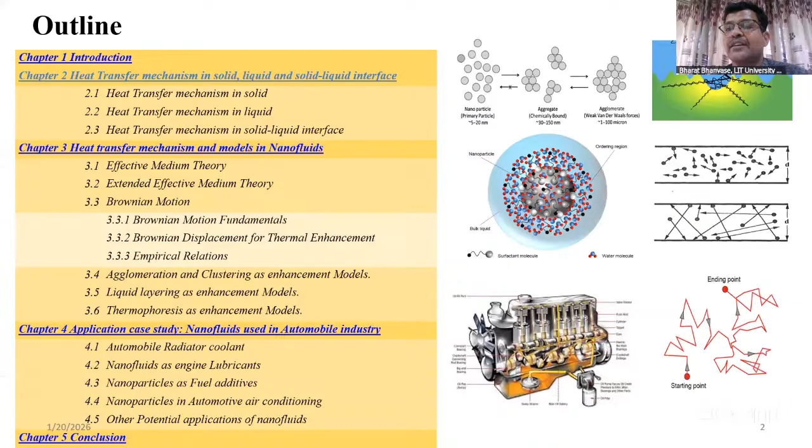Then we'll see applications as case studies: radiator coolant, engine lubricant, fuel additives, automobile air conditioning, and other potential applications also we'll see. That is the part I will cover in the first talk.

So if you see the introduction, nanofluid - that term was first coined by Choi in 1995, in his paper presented at ASME. What he did was suspend micron size particles. That was the old phenomena, which no doubt had a lot of problems if you have micron size or larger particles.

If you have larger particles, that will create erosion, pumping cost and viscosity will increase, and several problems you will get there. So Choi introduced particles in the fluid and observed some improvement in thermal properties, which are very important in heat transfer applications. By addition of this particle, he observed some improvement in heat transfer properties. But if you use large particle size, it is very difficult to explain theoretically, and it's not reproducible.

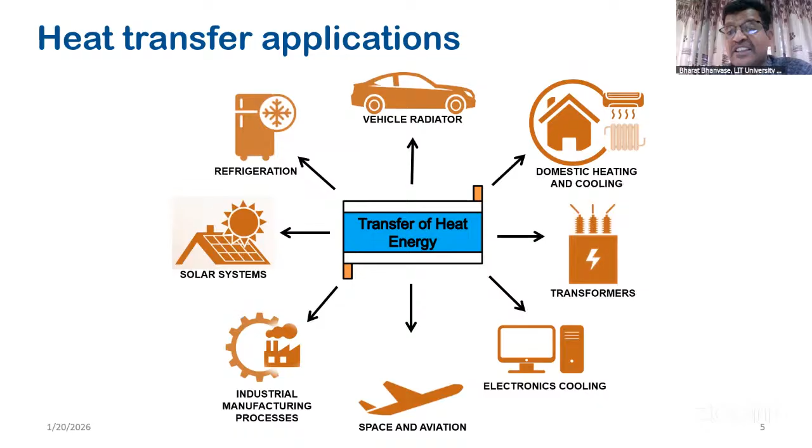Industrial manufacturing processes are there. Space and aviation is there. Electronic cooling is again very important, that is another system you can find. If you take your laptop, fan is running - so fan is for what purpose? It is just taking out the heat which is generated in the processor. Transformers, domestic heating, cooling - these are different applications for heat transfer.

So how can we improve the heat transfer rate? If you see the motorcycle engine, two-wheeler engine, outside portion of that engine has extended surfaces, called fins, and because of that heat transfer will be higher on outside surface. So if you increase the area, there would be increasing heat transfer.

Another way is you can create a micro channel, a small channel. That means the diameter will be very small, and volume will be less, but surface area will be more. So heat transfer rate can be improved. That is one way where heat transfer can be increased.

So what are the heat transfer fluids used in these processes? One is water - you will find in many applications water is used in industry as well as household application. Ethylene glycol is there, hydrocarbon oils are there, refrigerants are there, because your air conditioning is running on this.

Phase change fluids are there. Phase change means during heating it will accept the energy and it will melt, and during release of energy it will give back the energy and it will solidify. That is a phase change - only latent heat of melting. So that will absorb, that's it.

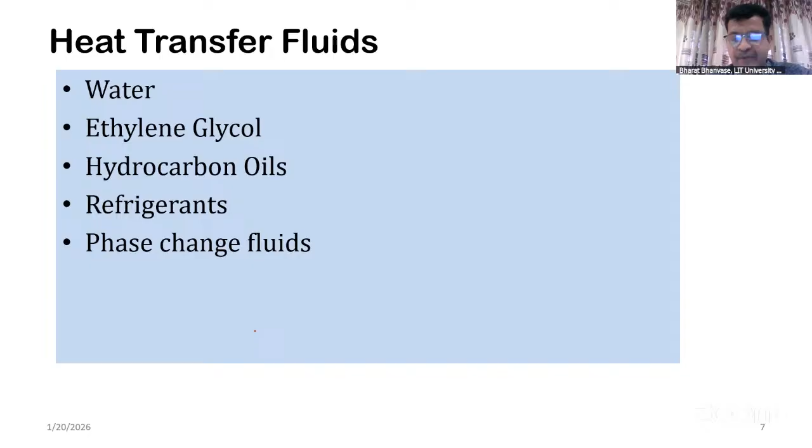So if you see the fundamentals, already we know conduction, convection, and radiation. For conduction, suppose you see a tightly packed solid material. In the case of solid, all the molecules are tightly packed, so heat transfer will be in sequence, from one molecule to another, through the vibration of molecules, propagating phonons, and diffuse free electrons.

These are different applications here. Then another type is loose molecules - that is your liquid and gas. In liquid, distance will be there, so collision between molecules is very important for transfer of heat from one part to another. For gaseous systems, distance will be more, so heat transfer will be less, because the distance between two molecules is very high compared to liquid. So the thermal conductivity of gases is very less.

So gases have thermal conductivity less than 0.1, or less than 1 watt per meter Kelvin. For liquid, for water, it is from 0.2 to almost up to 10. Then for more non-metallic solids, like ice or other material, that is ranging from 0.8 to 100.

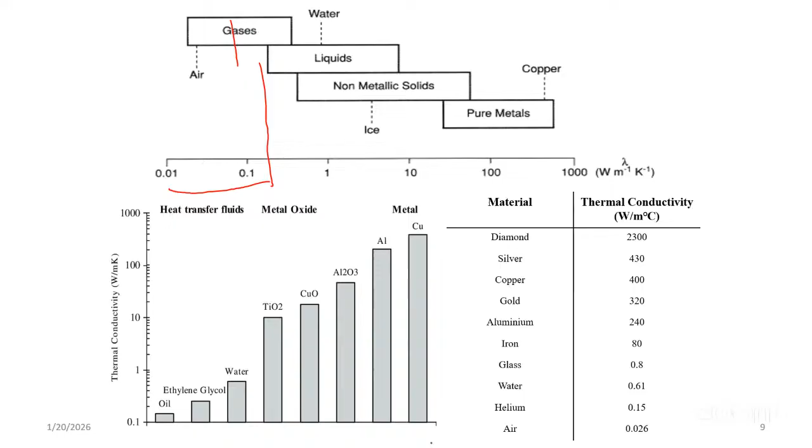Okay, we'll continue. For pure metals, thermal conductivity is very high. For air, thermal conductivity is 0.02. Then for helium, it will increase to water, that is 0.61. And it will increase to diamond - diamond is almost 2300 watt per meter Celsius. That's how, for metal oxide or other things, you will find improvement in thermal conductivity as you go from gas to solid phase.

So if you have micro size and macro size particles - macro size, that means if you have larger particle size, you will have one advantage, higher thermal conductivity, no doubt, but disadvantage is agglomeration, clogging, erosion in pipeline, and higher pressure drop. These are the problems you will observe with this.

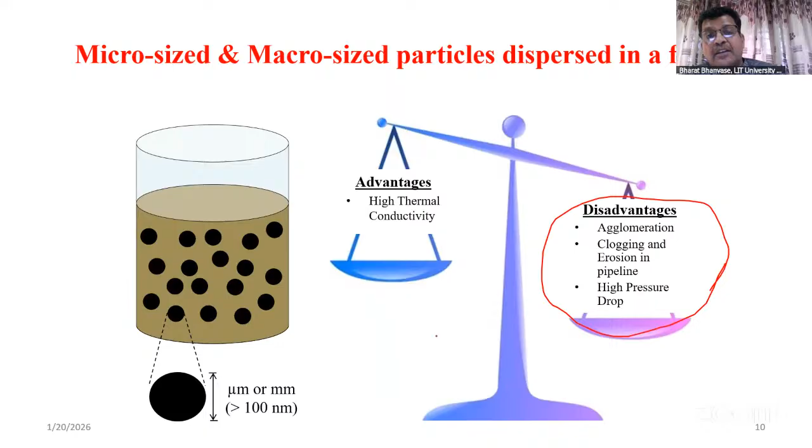Then nanofluid is another one, as we are discussing, that is very important. Here nanometer size particles are dispersed in the liquid, and these particles are suspended. In suspension, many times settling is observed, but for that you can have some surfactant and you can stabilize that.

So these suspended particles in a liquid, that is called nanofluid. Nanometer size particles, that is very important. Choi and Eastman termed this in 1995, which will have higher thermal conductivity, large surface area, high stability. That was the intention, that was the objective for this particular nanofluid.

So what are the advantages of nanofluid? High heat conduction, that is one. Then stability will be more. Then microchannel heat transfer without clogging, that means if we have a small diameter pipe through which nanoparticles should pass, then reduced erosion, so the pipeline will be intact, it will not get damaged. Reduction in pumping power, that is another application.

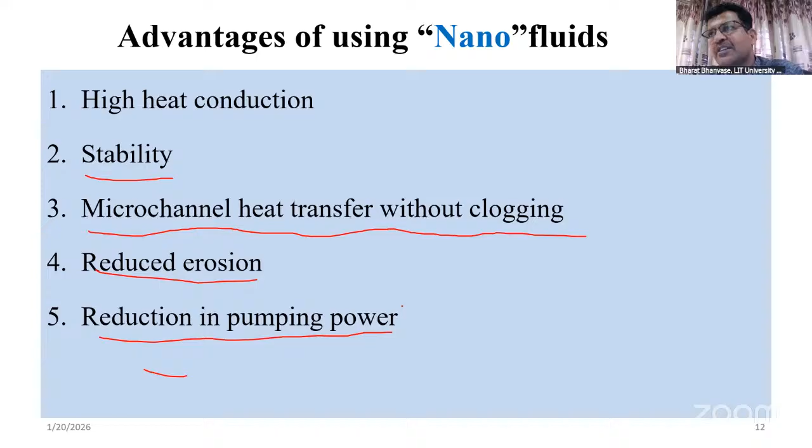Fluid, that means water or anything you can take here. Another one is movement of this particle, that will be motion, that means every particle when suspended in water is in motion. So that is another way by which transfer of heat will take place. So these are the different mechanisms.

If you see Brownian motion, every free particle present in gas or liquid will take a path and move in different directions like this, right, it is free to move. During this, that is called Brownian motion. So that is one phenomenon, that's how energy is transferred from one location to another location.

Another one is nanoparticle clustering, that is another phenomenon. So your nanoparticles form a chain like this, and that's why heat transfer will take place in this particular direction. There is heat conduction, you can say.

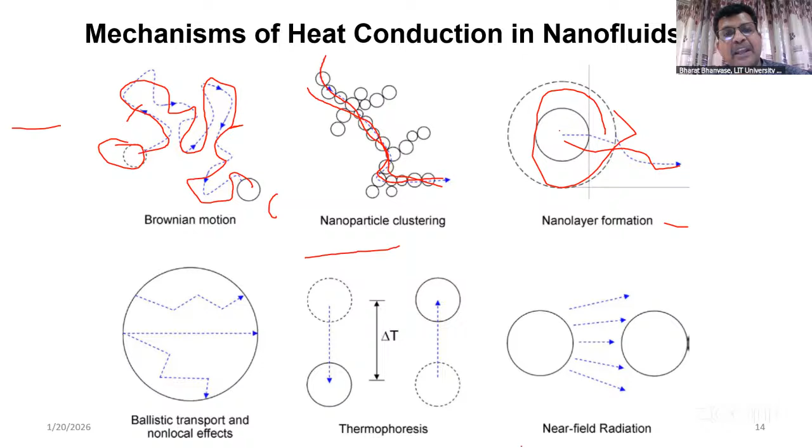Another one is nano layer, that means some solid-like layer is formed around the nanoparticle, and that's how heated nanoparticle, that means heat, will be transferred from this nanoparticle to the fluid. Then ballistic transport, that is because of non-local effect, thermophoresis, that is because of temperature difference, then near field radiation. These are the different phenomena, mechanisms by which heat conduction takes place in the liquid.

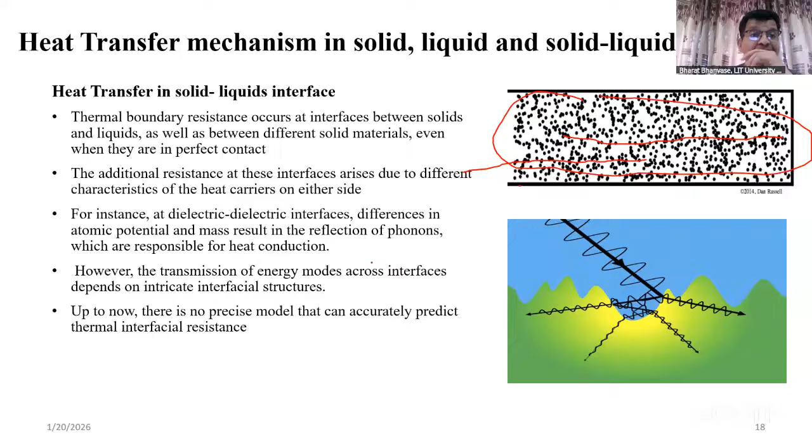Then this is solid-liquid interface. Suppose this is the case: here we have stationary nanoparticles suspended in water, and if you give some shock on one side, there is a movement of particles and they will start colliding like this, and that's how heat is transferred from one point to another particle, another point. So that is the solid-liquid interface part.

So if you see the mechanism, we have already discussed this. Brownian motion will be there, that means the nanoparticle will move in the liquid from one point to another point in suspended manner.

So that is the Brownian motion, you can say. Clustering of nanoparticle, already we have seen. So two nanoparticles will form a layer, and they will form a chain, and then heat transfer will take place from one particle to another particle.

Then nano layering of liquid and liquid nanoparticle interface, that is another one. So if you see this nano layer, we have this particle, and around that one layer is created, and that is a conductive cover which is generated, and that's how heat is transferred from one particle to the liquid and then another particle. Then ballistic transfer, that is because of some shock wave.

Then thermophoresis, that is because of temperature difference. So if you see this effective medium theory, that pertains to analytical and theoretical modeling that describes the macroscopic properties of the composite material. If you have different composite materials arranged in series or parallel, its thermal conductivity can be calculated using these equations, and that is well presented by Maxwell's in 1873.

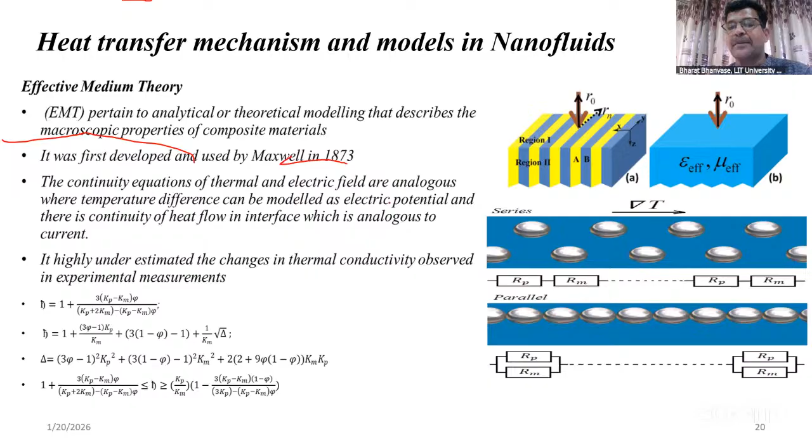So initially we have separate nanoparticles, but then aggregates are formed. This is one aggregate, another aggregate, like this, so it will form a chain-like structure. That is because of weak van der Waals forces which are present there, and no doubt if you stir or apply some force, that will get separated.

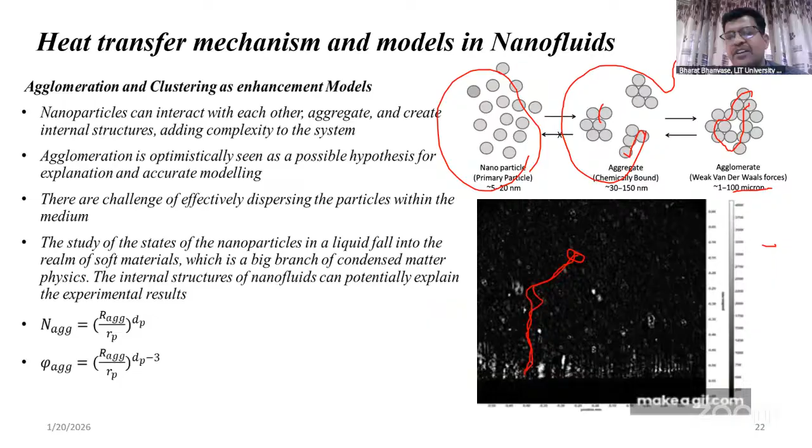So that is another mechanism by which heat transfer can be improved with the use of nanoparticles. So this is thermophoresis. With increasing temperature, no doubt every particle will accept that energy, and its energy will increase and its movement will be fast. So bombarding of these nanoparticles on each other with increasing temperature will be higher than with decreasing temperature.

So another case, if you go ahead, that is all fundamentals already we have seen: Brownian motion, then nano layering, thermophoresis, nanoparticle clustering. So that part already we have seen, and now we have classification of nanofluid.

How can we classify this? There are two types. Nanofluid is nothing but addition of nanoparticles in water or ethylene glycol, that is liquid, so solid particles are added in liquid. If you use only one type of nanoparticle suspended in water, that is called mononanofluid, meaning one type of nanoparticle, just like copper oxide dispersed in water. Only copper oxide, that is mono.

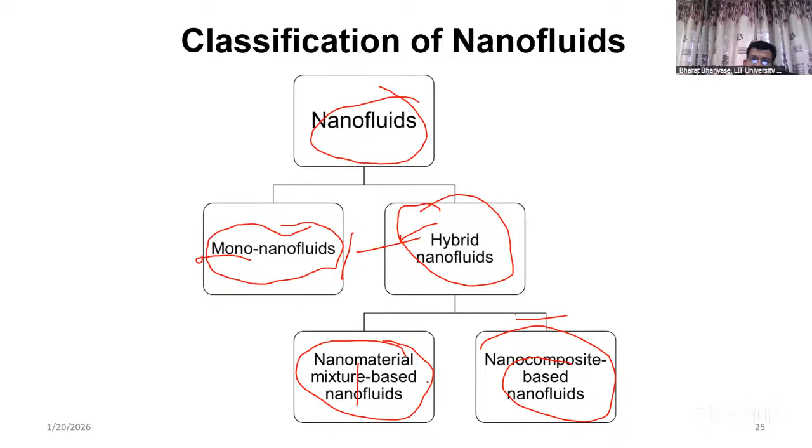And then it is added in base fluid, so that is forming nanofluid. That is called nanocomposite based nanofluid. And the first one is nanomaterial mixture based nanofluid. So that is the classification you can see.

So what are the applications you can find here? Applications are a wide range. Starting with heat transfer, heating, cooling, thermal management system, refrigeration system. Nowadays nano refrigeration concept is there, right? Many people are working on this concept.

Then solar thermal system. We have one project now from Maharashtra Energy Development Agency of 1 crore, and we have installed 100 kilowatt solar panel system where we are applying nanofluid for heat transfer purpose here.

Then extraction of energy from sources. That means in such cases, material selection is very important. Remember, how we are selecting nanoparticles is very important. So nanoparticles should be dispersed properly in the system. Here the dispersion is okay.

One more point is when you are saying extraction, that means how energy is taken from one source, suppose a solar system. It should be able to take that energy very fast, and then it is transferred. And if you want to store that, then heat capacity of that nanoparticle should be very high. Only then will it store the energy. So that is another application.

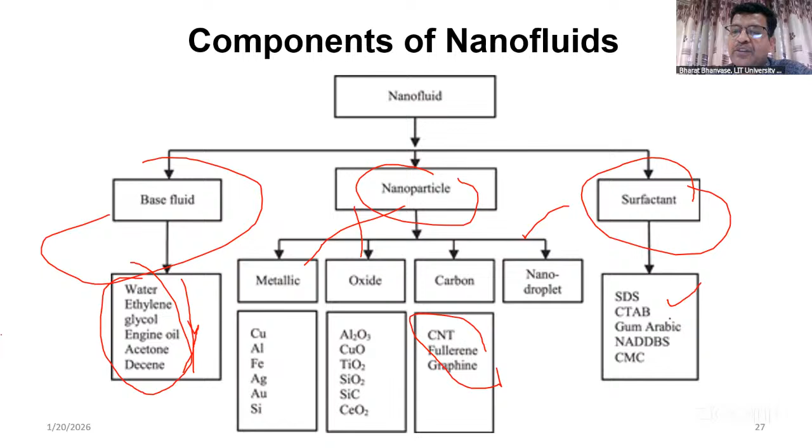Then another part is surfactant, because many times these particles get settled. In that case we need to add some stabilizing agent, that is sodium dodecyl sulfate or CTAB or gum arabic, or CMC. Other surfactants can also be added based on the material we have selected.

So preparation of nanofluid - this is one case study I'm putting here. Suppose one step method. What happens in one step method? Suppose I want to disperse copper oxide. For preparation of copper oxide, what type of precursor, that means reagents, are required for the preparation of copper oxide.

So what I will do, these precursors will be added - that is first reactant, this is second reactant. These two reactants are added to the system, and then reaction takes place. During reaction, copper oxide is formed, and this copper oxide is in nanomaterial size. So that is suspended in the system, and the same system will be used as a nanofluid.

That is called one step, meaning only one step. That means reaction is taking place, and whatever nanoparticles are formed, the same is used as a nanofluid.

But what are the drawbacks here? The drawback is nothing but whatever impurities are formed because of the reaction, that means byproducts or some unconverted material. That will remain as it is in the system, and no doubt that will affect the properties of the nanofluid. So how should it be then?

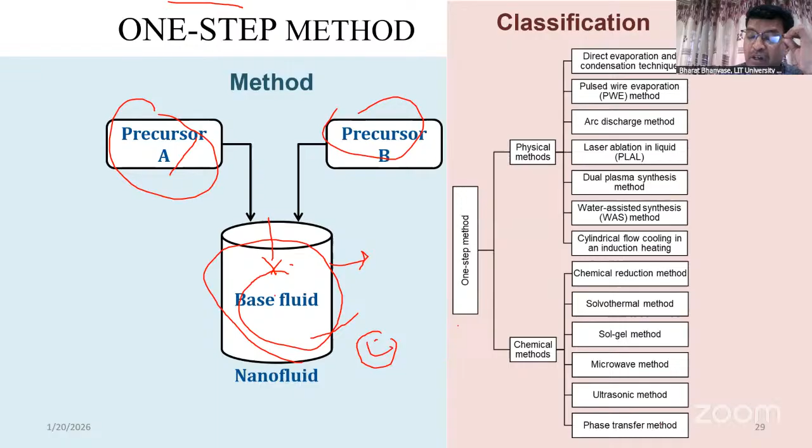So for nanofluids, what are the different studies related to this? What type of study can we carry out? One is preparation of nanofluid by one-step as well as two-step method. Once it is prepared, we have to check the properties of nanofluid. What are the properties that you can check?

One is thermal conductivity of nanofluid, which we can check using the transient hot wire concept, and for that the KD2 Pro instrument is available. With this you can calculate the thermal conductivity. Then another property is viscosity, for which you can use a viscometer or rheometer, or check rheological properties as well.

Another property is density of that nanofluid, which you can measure using a density bottle or other density measurement instrument. Then specific heat, CP value, and then surface tension can also be calculated. So these five properties are very important for nanofluid, because based on that only we can design the application system.

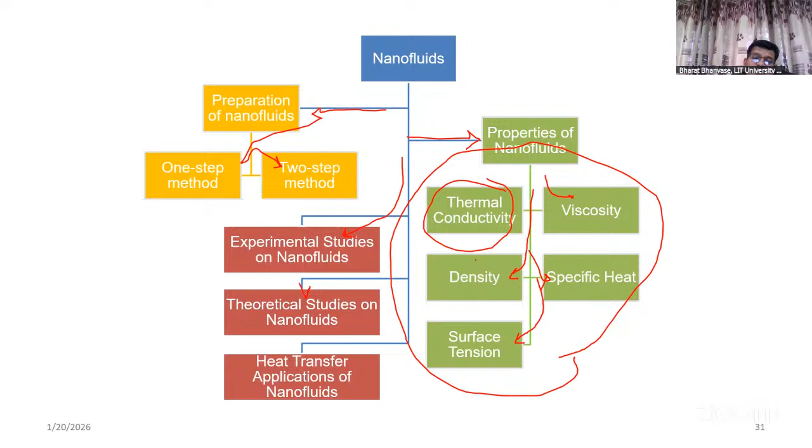Then for theoretical studies, based on experimental data, empirical correlations can be developed, such as relations for thermal conductivity, density, viscosity, or specific heat. Some theoretical studies can be calculated using heat energy balance equations or material balance equations. And heat transfer applications can be seen in solar systems or transformers, and many other applications as discussed earlier.

So that is part of nanofluid. Why is there a need for research? Many people are working on nanofluid, so why is there a need? Because we need to identify what enhancement in heat transfer is achieved with the use of nanofluid. That is very important - by adding nanoparticles, how much enhancement is possible.

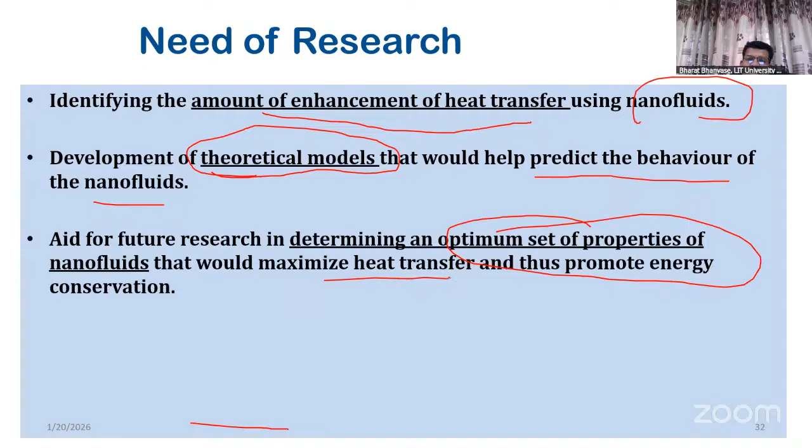Then we have to see some theoretical models that will predict the behavior of nanofluid properties, such as thermal conductivity, viscosity, or density. And no doubt we have to see the optimum set of properties to maximize the heat transfer, and thus promote energy conservation.

Another aspect is that if we have nanoparticles of different size, shape, different types - that is 1D, 2D, 3D, 0D nanoparticles - as well as its concentration and composition, that will affect the base fluid's dispersion or properties. Different properties will alter and change with the addition of nanoparticles, such as thermal conductivity, viscosity, density, and heat capacity.

So that is very important, that we need to see how it is getting changed with respect to addition of nanoparticles. Then effectiveness of heat transfer processes employing nanofluid also depends on various flow geometries and conditions. Then some applications proposed for the nanofluid require mathematical support and simulation in order to interpret their actual behavior.

So what are the gaps in study? More research is on fundamental than industrial application. That means many fundamental studies are done, but industrial applications are many missing there. Then various geometries, lab scale heat exchangers, solar and refrigeration setups - that study is needed.

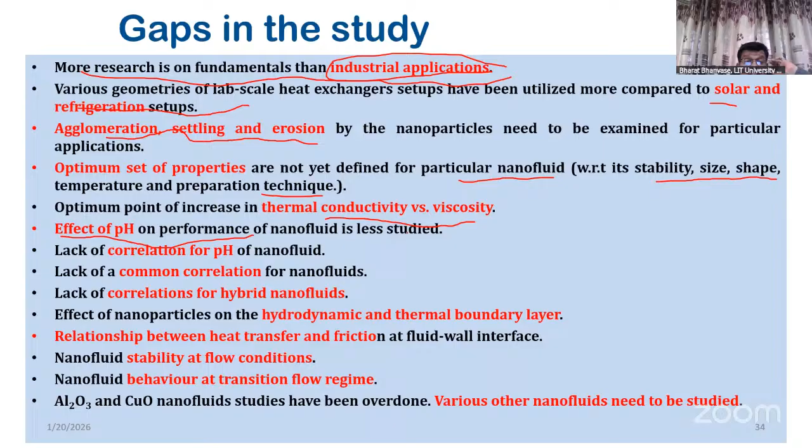Then effect of pH on the performance of nanofluid, that we need to see. Lack of correlations for pH, because pH will affect - acidic or basic medium will affect the stability of nanofluid. Then different common correlations for nanofluids, lack of correlations for hybrid nanofluids, so that fundamental research can be carried out. Then effect of nanoparticles on hydrodynamic and boundary layer theory, the boundary layer thickness - how it will change and how it will affect the heat transfer properties. Then relation between heat transfer and friction at the fluid walls interface.

Then nanofluid stability at different flow conditions, nanofluid behavior at transition flow region - laminar, turbulent - that also we have to see. Copper oxide and Al2O3, many people have studied. Other nanoparticles we need to see - so many are there. You can see different parts, some theoretical studies also you can do, CFD - computational fluid dynamics - and all this can be done again.

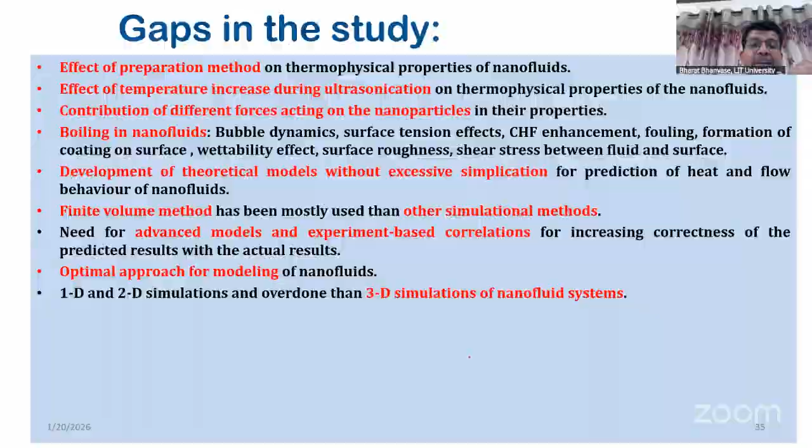So one case study I will put on this, and then another part I will see. What we did - we have prepared Ag-doped Fe3O4 nanoparticles in the lab, and those are dispersed in water as a heat transfer fluid. And then that heat transfer study was in pinch pipe. Pinch pipe is, I will show how it looks like.

So in this case, what we have done - we have to see the desired structure of nanoparticle is very important here. The synthesis process that we need to consider here. So Ag-doped Fe3O4 nanoparticle addition will create a composite, and that composite was prepared by ultrasound assisted technique and mini reactor - that is very small reactor we have used for the preparation of nanoparticle, and its synergic effect was studied in this case.

This formed Fe3O4 nanoparticles were dispersed in reaction medium, and then AgNO3 is added, and then sodium borohydride - so that will lead to the Ag-doped Fe3O4 nanoparticle. Its characterization is done by XRD, FTIR, then other techniques. And then preparation of nanofluid is done, and then stability test was carried out. Then thermal conductivity measurement was done, density measurement was done, and then convective heat transfer and pressure drop study was carried out for this case study.

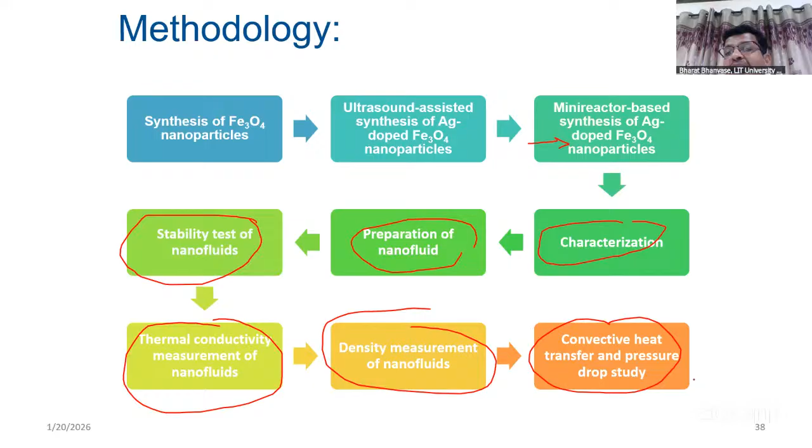So if you see the experimental part here - FeSO4, FeCl3 addition, then NaOH was used, AgNO3 was used, sodium borohydride was used. And then sodium trisodium citrate dihydrate was used as a surfactant.

So what we did - FeSO4, FeCl3 is added, that mixture was done, and then it was sonicated in a bath sonicator, and then addition of NaOH was done here. This ultrasonication - after addition also ultrasonication was continued, and after that filtration, and then that will lead to the formation of Fe3O4 nanoparticles.

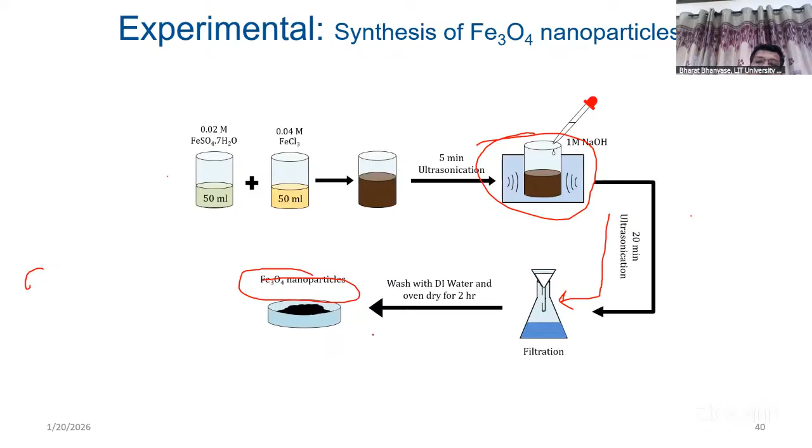So that was done in lab. Here we have taken some amount of Fe3O4, that is 0.2 gram, and it is sonicated for achieving proper dispersion. Then trisodium citrate dihydrate was added to stabilize the particle, and we added sodium borohydride, then dropwise addition of AgNO3 solution was carried out. So on the Fe3O4 nanoparticle, deposition of Ag nanoparticle takes place, and after filtration you get Ag doped Fe3O4 nanoparticles.

We tried different sodium borohydride concentrations as well as surfactant concentrations. This is the setup for the preparation of nanoparticles in syringe A, B. The first one was with ultrasound only, and this was done with a minireactor. Syringe 1, A, B, C — this material goes inside and flows inside, and during its flow the reaction takes place, and you get nanoparticles at the end. So this is your geometry.

The length of this reactor is 1.79 meter. The inside diameter is 2 mm, and the outside diameter is 5.5 mm. That was there, and this is the setup we have used.

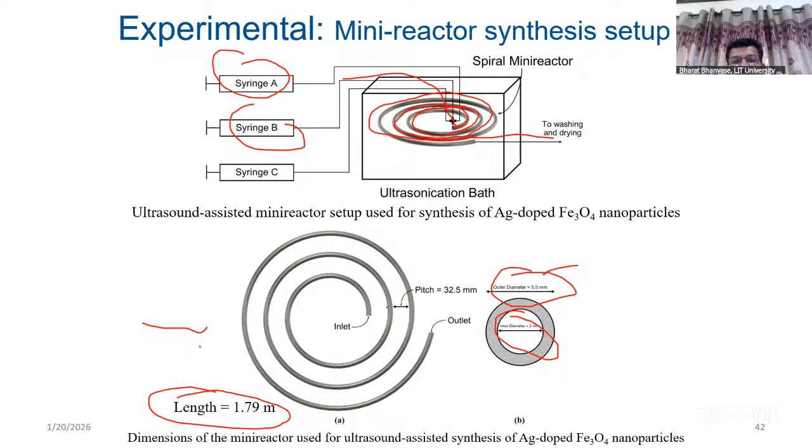In syringe A, we used 0.2 gram of Fe3O4 nanoparticles, sonicated in the presence of sodium citrate, with flow rate maintained at 200 ml per hour. In syringe B, we added AgNO3 solution, 0.01 molar, with flow rate 100 ml per hour. In syringe C, sodium borohydride solution with different concentrations, tried in lab, at 100 ml per hour.

Syringe A is your Fe3O4 nanoparticle with surfactant, B is with AgNO3, C is with sodium borohydride. As soon as it enters, the reaction starts, and during its flow crystal growth takes place — deposition of Ag occurs, and by the time it comes out, doped material formation is there. That was characterized by UV-Vis, FTIR, XRD, and TEM analysis.

Nanofluid preparation was done by the two-step method, because the Ag doped Fe3O4 nanoparticles we prepared were dispersed in water with the help of ultrasonication, so it is well dispersed in the water. Then we carried out the stability test using the sedimentation method. For that, differently concentrated nanofluids were prepared, and the test was carried out for 2 months, with photographic evaluation done here.

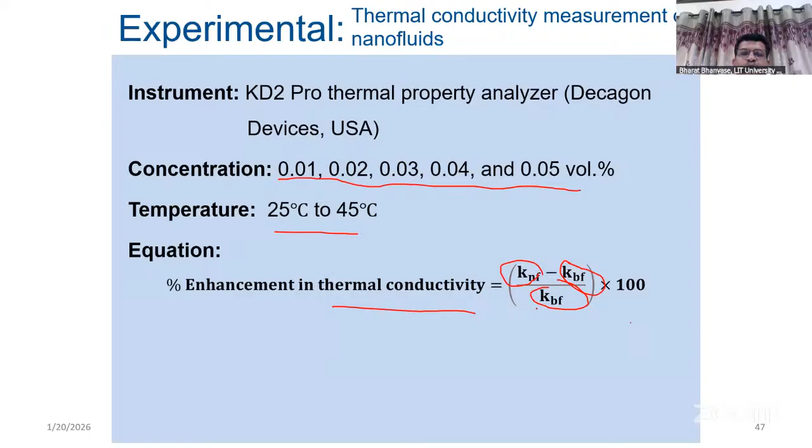For thermal conductivity, we used a thermal property analyzer for the measurement at different concentrations. Concentration of nanofluid is 0.01, 0.02, 0.03, 0.04, 0.05 volume percent, and temperature was varied from 25 to 45 degree Celsius. Percent enhancement in thermal conductivity was calculated as thermal conductivity of nanofluid minus thermal conductivity of base fluid, divided by thermal conductivity of base fluid. That is the simple relation used for the calculation.

Density measurement was done by density bottle with the same concentration of nanofluid at room temperature, and relative density was calculated. This was the experimental setup used for the heat transfer study.

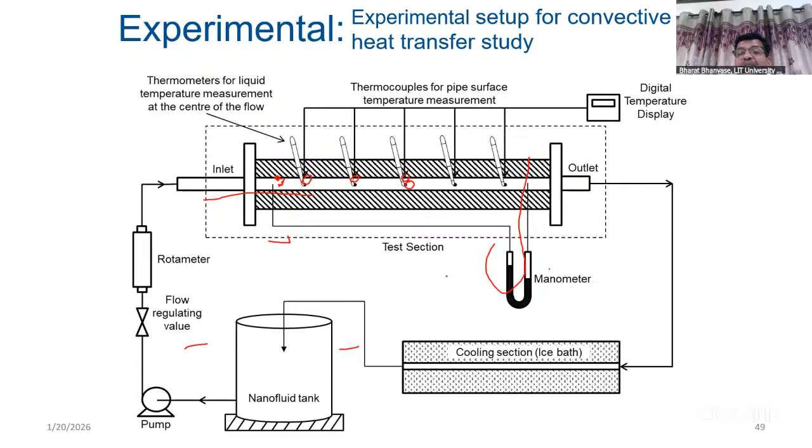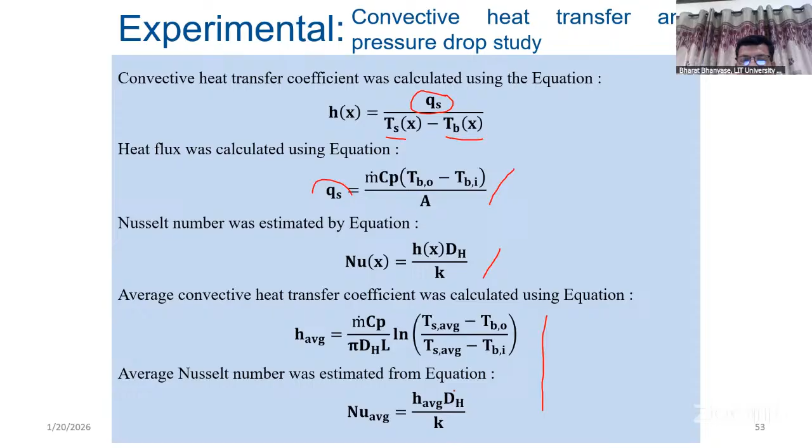Then pressure drop calculation was done by delta H rho G, and also by the Darcy-Weisbach equation. Friction factor was calculated from delta P. You can substitute delta P here, length of pipe, velocity, density, and diameter, and from that you can calculate the pressure drop.

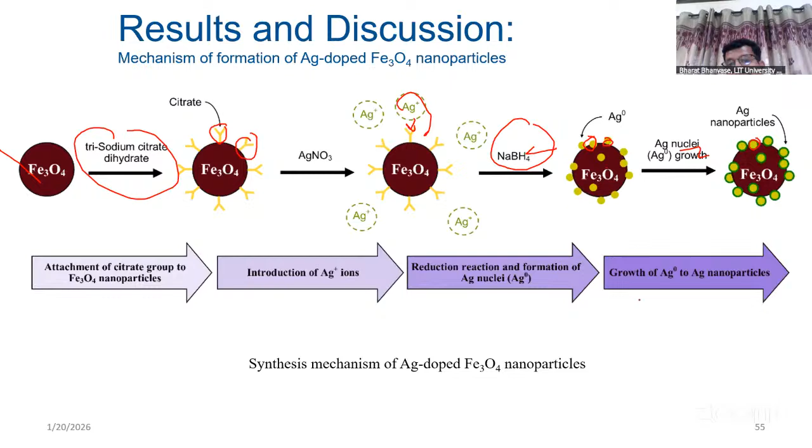So advantages of ultrasound: better contact between the reacting species, exposure of Fe3O4 nanoparticle would be very good, and distribution of Ag over the surface - that is uniform distribution of Ag over the surface of Fe3O4. So that is the formation of Ag-doped Fe3O4 nanoparticle.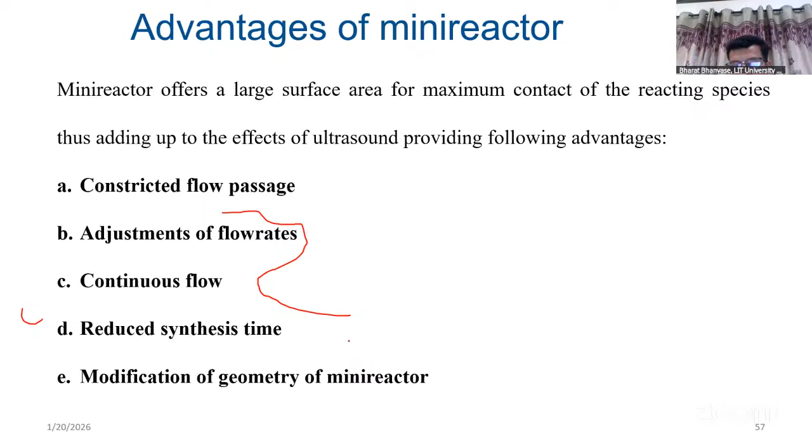And microreactor, or we are calling this a mini reactor, it's the same thing again. Here we have small reactor diameter, so adjustment in flow, continuous flow will be there, so continuous synthesis of dope material is possible. Reduced time, so in lesser time, formation of Ag dope Fe3O4 nanoparticle is there. These are some advantages.

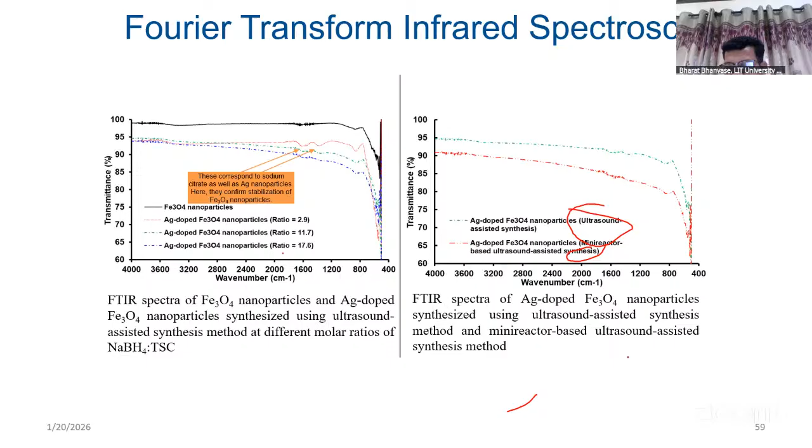But if you see the Ag-dope Fe3O4, this is another one, you can see Ag doping is there on these particles. Then we have carried out the stability test - this is initial condition at different volume percent. After 1 hour, you will observe settling, this is for the case of only Fe3O4 dispersed in water, that is water-based Fe3O4 nanofluid.

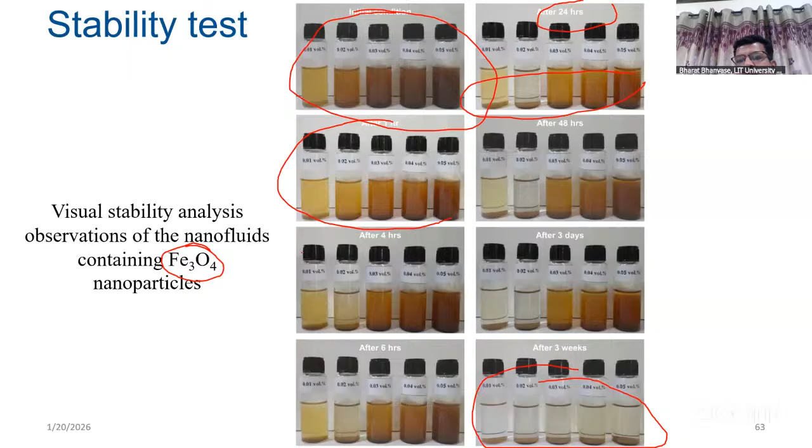Then settling continues after 24 hours, you can observe this, and then after 3 weeks, complete settling was observed. So that's why you can say Fe3O4 nanoparticles, even if in smaller size, its stability after maybe 24 hours or so gets decreased.

If you see this ultrasound, that is Ag-dope nanocomposite or nanomaterial prepared in mini reactor, ultrasound assisted mini reactor, it is observing higher stability here. After 6 weeks also, you will observe the nanofluid is stable here.

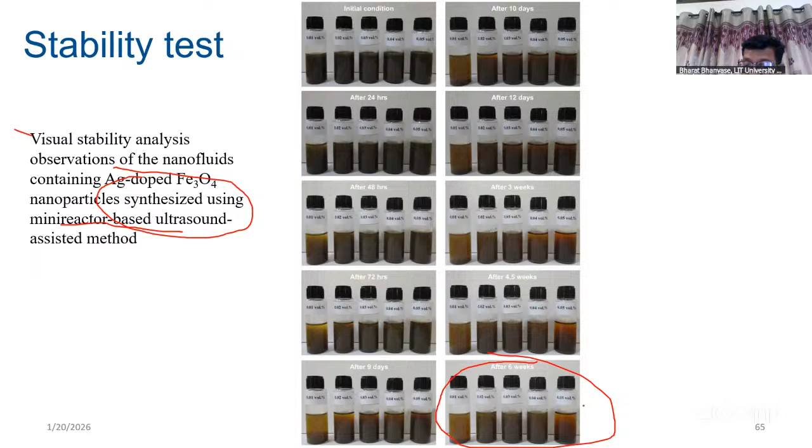So stability study was carried out here, and you can observe this at different volume percent: 0.01, 0.02, 0.03, 0.04, 0.05, 0.1, like that.

So here one phenomenon is observed, its primary stable period. This is primary stable. After that settling is observed. Then stability regaining period - regaining means some cluster formation takes place, and that will again improve the stability. That means some forces get balanced, interactive forces between the nanoparticles get balanced, and you will observe complete stability after this. That is secondary stable period.

But Fe3O4 is unstable, right? So settling period is there, no doubt. But with the addition of Ag-dope material, stability gets improved here.

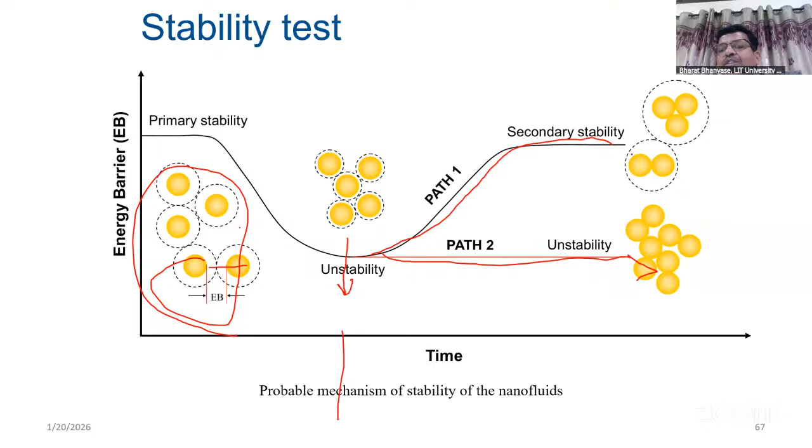So from that we have just predicted some mechanism. So this is initially stability, right? No doubt energy barrier is calculated between the two particles. And after that, once that energy gets balanced, in that case your unstable period will be there - another unstable period, and then it will continue. In the case of Fe3O4, we observe this. But in another case, secondary, some redispersion of these clusters was observed, and that is nothing but your secondary stability period.

Then we have measured thermal conductivity as a function of concentration of nanoparticles at different concentrations, and at different temperatures also. We observe that with addition of nanoparticles, thermal conductivity gets improved, with the addition of nanoparticle as well as with increasing temperature, both. So you can observe this.

In the case of Ag-dope, some interesting phenomena was observed. When we are measuring the thermal conductivity at lower temperature, we observe higher thermal conductivity, and then with increasing temperature it is decreasing first and then increasing. That was the observation we got in the case of Ag-dope Fe3O4 nanoparticle prepared by ultrasound assisted method or in microreactor.

Same observation here. So you can see the thermal conductivity which was calculated, and you can observe that at 45 degrees Celsius, highest thermal conductivity will be there. And with no doubt, with increasing volume percent of nanoparticle, thermal conductivity gets improved here.

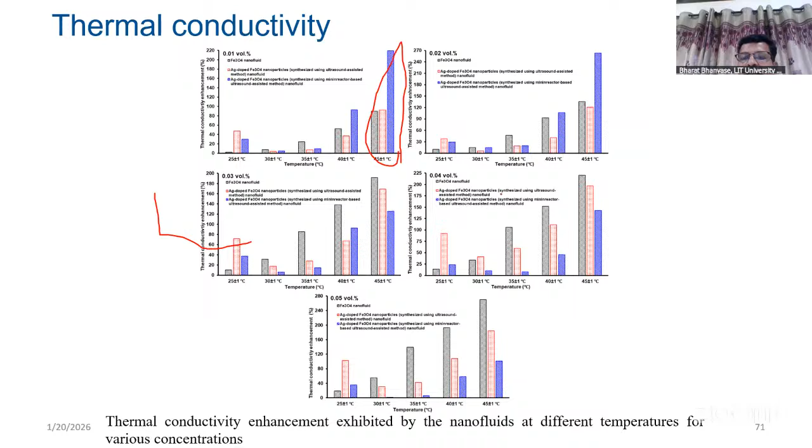Then convective heat transfer study, we have calculated Nusselt number. Already we have discussed some correlations in previous slides, and from that we have calculated. So at different positions in the reactor, in the heat transfer tube, we can calculate the heat transfer. It is observed that with increase in Reynolds number, the Nusselt number gets improved here.

This is for 0.01% volume percent, this is for 0.02% volume percent - that nanoparticles we have added in the base fluid. So that's how it is improved here, at different Reynolds numbers we have calculated.

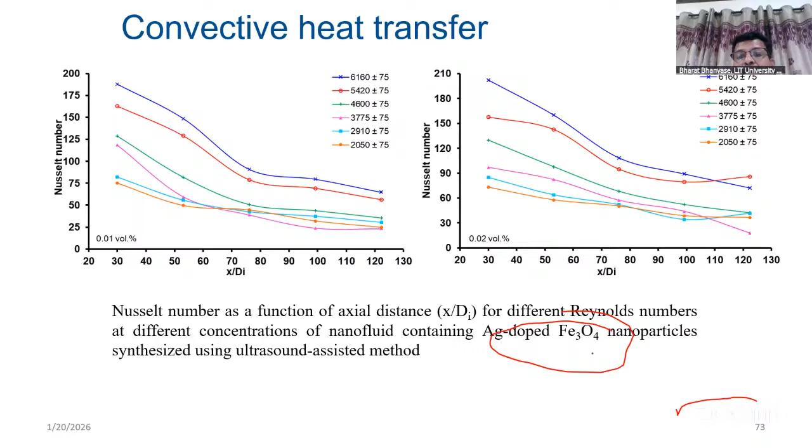That's why that shows that in microreactor with the use of ultrasound, some crystalline material is formed, and that is more effective in transferring the heat, which will have higher thermal conductivity. That material is properly formed, and that will help in enhancement in the heat transfer.

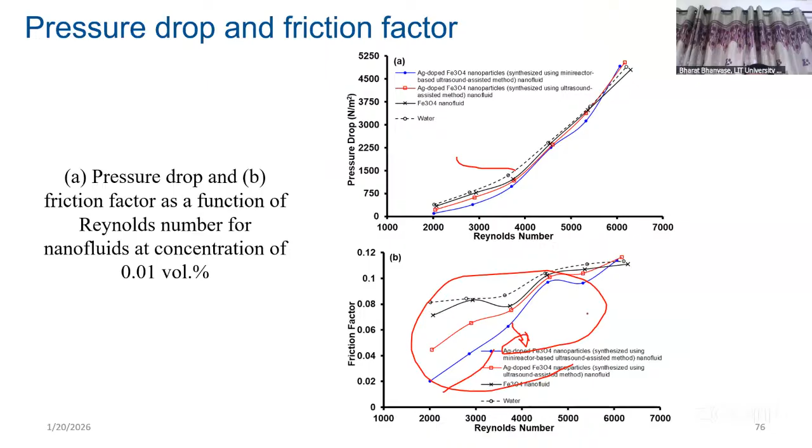So that is called shear thinning phenomena. If you see the rheological properties, with the addition of nanoparticles, in some cases if you apply pressure, viscosity decreases. There are some cases where by applying pressure, viscosity increases - where viscosity increases, that is shear thickening; where viscosity decreases, that is shear thinning. In this case, shear thinning phenomena is observed here.

Coming to different applications, nanofluids can be used as a coolant in car radiators, in internal combustion engines. This is the radiator, this is the airflow, and the nanofluid will flow and come to the engine. It will take heat from the engine and reject it here. So nanofluid will improve the heat transfer rate, and engine efficiency can be increased.

We can also add these nanoparticles in engine oil, which will improve the lubrication effect in the system.

Another application is that with the addition of these nanoparticles, they can act as a catalyst in the piston chamber where fuel burning occurs. As a catalyst, it will convert your fuel completely into carbon dioxide or water, so there is no formation of carbon monoxide, which causes black smoke.

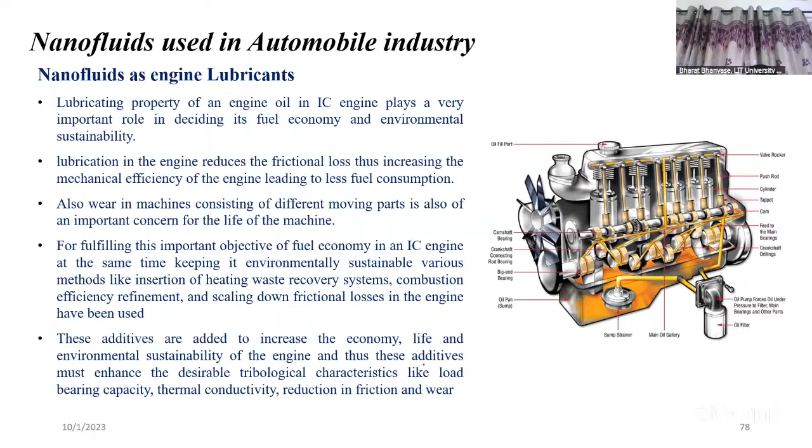You can also add this nanoparticle as a fuel additive. As discussed, it will have some catalytic activity that helps in converting your fuel completely, ensuring complete combustion by adding these nanoparticles.

Then in air conditioning, nowadays we are calling this nano-refrigeration. In this case, in a compressor, whatever oil is present, we add some nanoparticles, and that improves the efficiency of the refrigeration system. No doubt people have tried this at lab level, but at industrial level or actual case, it is still pending. Many people are working on this.

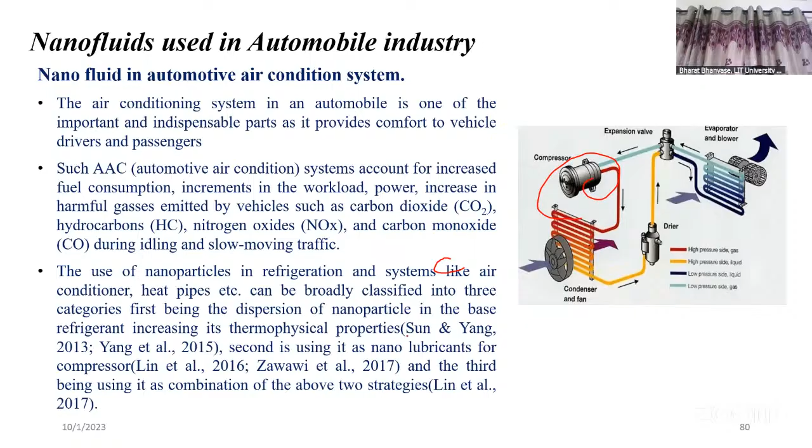Other potential applications of nanoparticles include polymeric nanocomposites. You can use them as additives in fuel cell batteries for preparation of electrode material or membrane material in fuel cells or batteries. Nanoscale sensor materials can also be prepared using these nanoparticles, and different catalyst preparations are possible.

Nanoparticles can be added during the preparation of tires, giving more strength to the tire. The nanocomposite coating industry is also very important - everywhere paint and coating is used, and adding different nanomaterials or nanocomposites improves coating efficiency, anti-corrosion properties, and mechanical strength. Impact strength increases, so after impact the coating will not get disturbed.

Heat shielding is there, nanofilm, self-cleaning is also there. That means if you have a super hydrophobic surface - suppose a kitchen sink coated with super hydrophobic material - whatever dirt, food material, or waste is there, it will not stick to the basin. So that is a good application, meaning the cleaning effect will be very efficient.

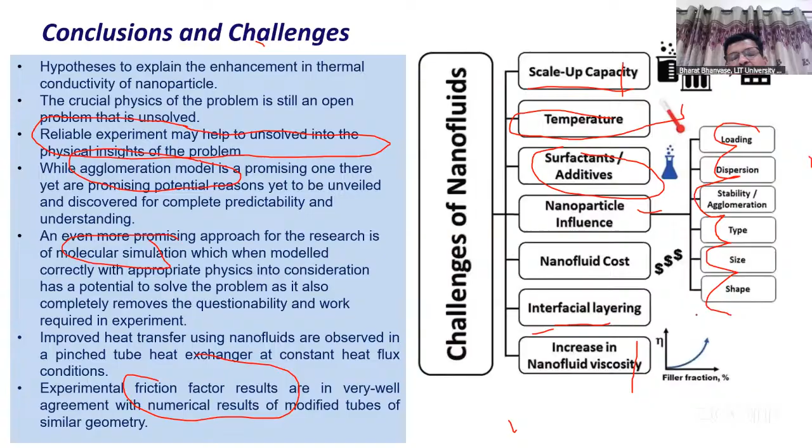Hello. Hello. Hello sir, yes. Dear participants, if you have any questions, the session is open for discussion. You can ask questions without any hesitation. I am Dr. Mote, sir.

You explained a very nice lecture in case of nanoparticles, and if we think of it as a coolant in a four-wheeler, how does it work, what benefit happens? We are adding some coolant in that system, right? Nowadays in different car radiators it is there, and they are using, I think, ethylene glycol.

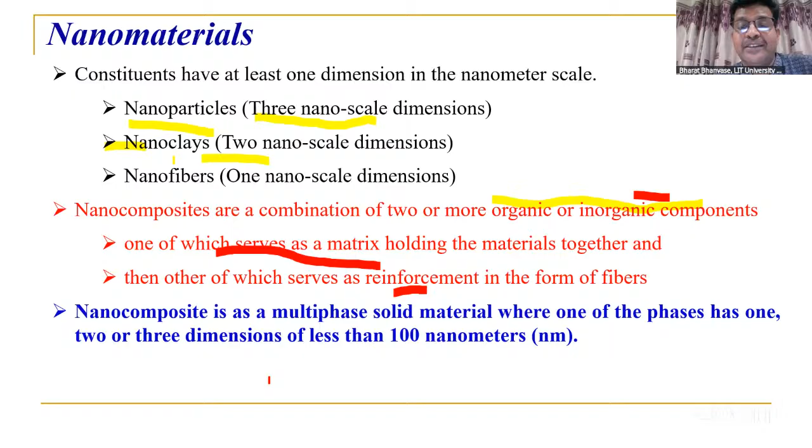For clay case etc. Then nanocomposite is a material, right, one phase or any other material which is in 100 nanometer diameter, or that is the dimension we have. So properties of nanocomposite generally depend on constituent phases, that means what material you are using, right, then relative amount, what amount you are using. Then geometry of that material which we are adding, that is dispersed phase, shape of the material, then particle size, particle distribution and particle orientation. Everything is very important to have a good property at the end.

So what does nanocomposite offer here - lightweight, design flexibility, so that is very important here.

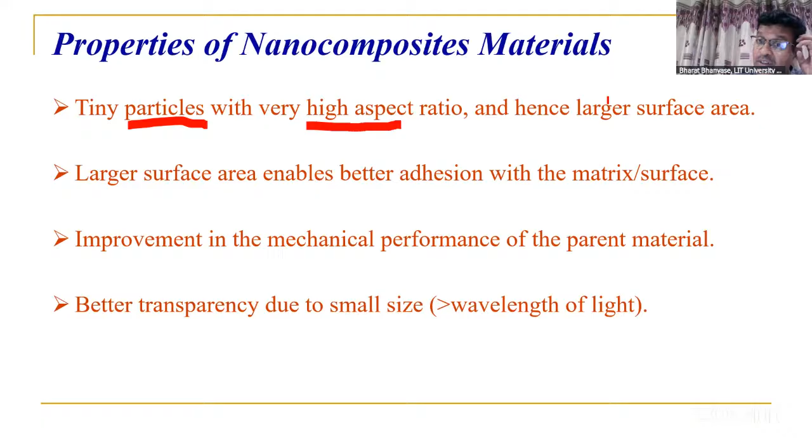Properties of nanocomposite material depend on particle size and aspect ratio, that means whether it is a rod shape or platelet-like structure. It depends on high surface area, which is very important. Large surface area is observed in nanoparticles, and this larger surface area enables better adhesion with the matrix, which is again very important.

There is improvement in mechanical properties of the parent material. When you add this material and disperse it properly, mechanical property will improve. For example, take a PVC pipe, polyvinyl chloride. If you prepare it only with PVC, that pipe is flexible. But if you add calcium carbonate nanoparticles, its strength will increase. That's why you can use PVC pipe with the addition of such materials, so the mechanical strength improves, and there is better transparency.

What is cavitation? That is sonication, or ultrasound. Here we are using sound energy that is passed through the liquid medium. At frequency greater than 20 kilohertz, it forms a wave in the liquid medium, and during this wave there is formation of compression and rarefaction, that means high pressure region and low pressure region.

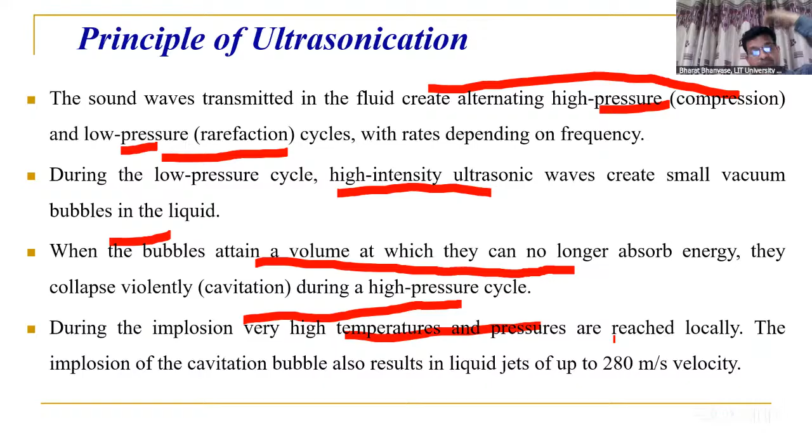During the low pressure region, there is formation of some bubbles, vacuum bubbles, and these bubbles' size will increase and they will collapse at one stage. Because of that collapse, it generates very high temperature and high pressure at a local point. Ultrasound is a cyclic sound wave whose frequency is above the limit of human hearing, so you cannot hear it. Only dogs and bats can hear this.

So when the low pressure region is there, nuclei formation takes place, then there is an expansion phase. That means during the low pressure region, the bubble size increases and attains maximum radius. After that, collapse of that bubble takes place, generating energy of about 10,000 Kelvin and pressure around 1,000 atmosphere, at a local point, for a very short time, a microsecond. This is the phenomenon.

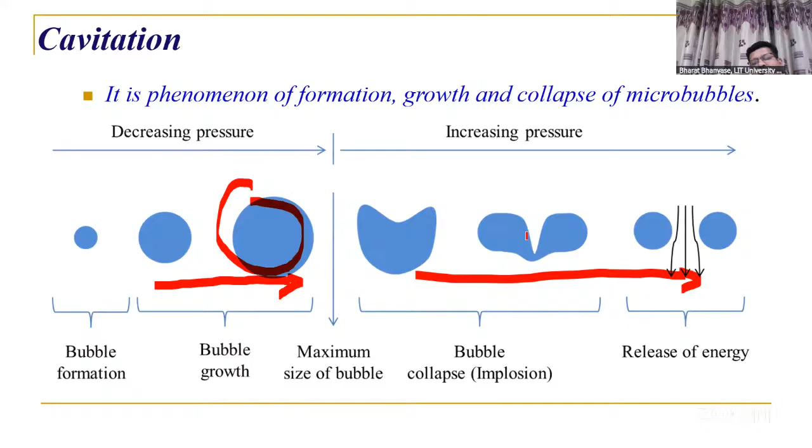So in decreasing pressure, cavity will form, and in increasing pressure, that cavity collapse will take place. There are two types of ultrasonication. One is direct sonication, where we add the ultrasound probe in the liquid medium, in the reaction medium, and it is operated in pulse mode, on-off type mode. That's why it is direct contact, so cavitation is generated in the reaction medium here.

In indirect sonication, we have a transducer here, the ultrasound is here, and there is a liquid medium in between, then the reaction mixture is here. So the ultrasound probe is not in direct contact with the liquid medium, that's why it is called indirect sonication.

The same thing can be done in hydrodynamic cavitation also. Here we can use a pipeline. Suppose this is a pipeline, and this is a pump, and liquid is pumped through this. The liquid will flow through it, and we put some obstacle.

Suppose there is a flange and a small hole is created here, and the liquid is passed through the small hole. Because of that, on the second side, there is formation of some bubbles, because the pressure becomes very low there. If pressure is less than vapor pressure, then bubbles will form, and these bubbles will collapse in this region, generating a lot of energy, which you can use to carry out reactions.

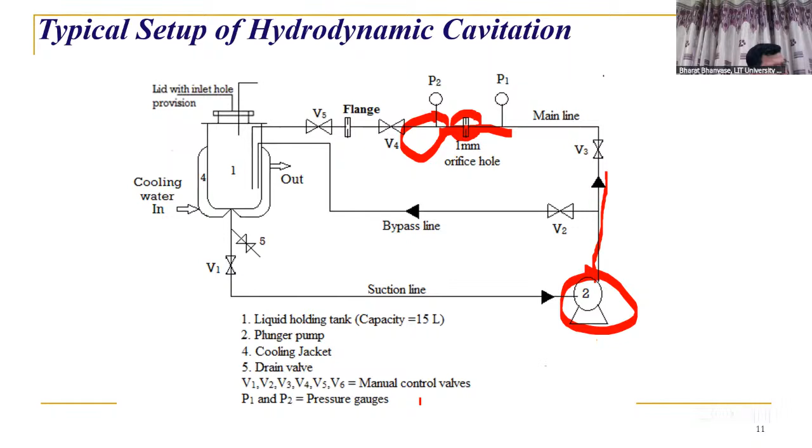This can be used for treatment of wastewater. Different reactions can be carried out using this, so different applications are there using hydrodynamic cavitation, and this is as per Bernoulli's theorem, which is in fluid mechanics in chemical engineering.

So what are the effects of ultrasound? Because of this cavity collapse, there is formation of turbulence, vigorous mixing will be there, then there is heating, shock waves will be there. These are some physical effects.

In chemical effect, due to collapse of the bubble, extreme temperature and pressure conditions are generated, and because of that, the water molecule gets broken into OH radicals and H dot radicals, and these radicals are very active and very reactive.

That will have a reaction with different pollutants in wastewater. If water has pollutants, they react and get removed. At the same time, if you have microorganisms and you want to clean the water, these radicals will kill the bacteria present in water also. So that is one more advantage, and that is very important.

But in our case, we are using this ultrasound for preparation of nanoparticles, for the preparation of nanocomposite. That is because of higher reaction rate. That is the important part. And cavitation can improve the processing, meaning if you use ultrasound, the reaction will take place in very less time. We did a reaction in our lab that went from 30 hours to 6 minutes. So that much time reduction is there.

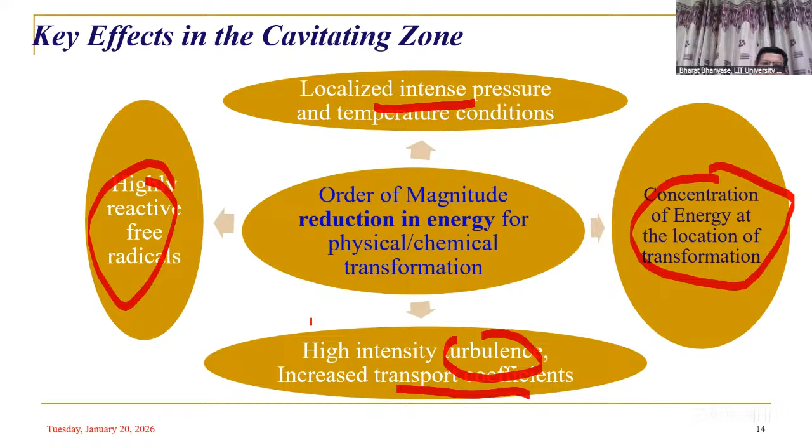Then the effect of ultrasound sonication: this gives effective contact between the reactive species, so the reaction will be very fast. It provides suitable reaction conditions at micro scale. There is prevention of combining nuclei, so agglomeration effect will be very less, and it promotes equal crystal growth, meaning every particle will have a similar size and shape. Agglomeration of particles is very less, very small tiny particle formation occurs, and you get monodisperse, similar-sized particles using this method.

If you see this conventional mechanical stirring for the preparation of molybdenum sulfide nanoparticles, versus using ultrasound, you can see very small particles are formed in this case. You can check this - small particle formation with the use of ultrasound. So you get uniform morphology and less agglomeration, whereas in the conventional case you get different types of morphologies.

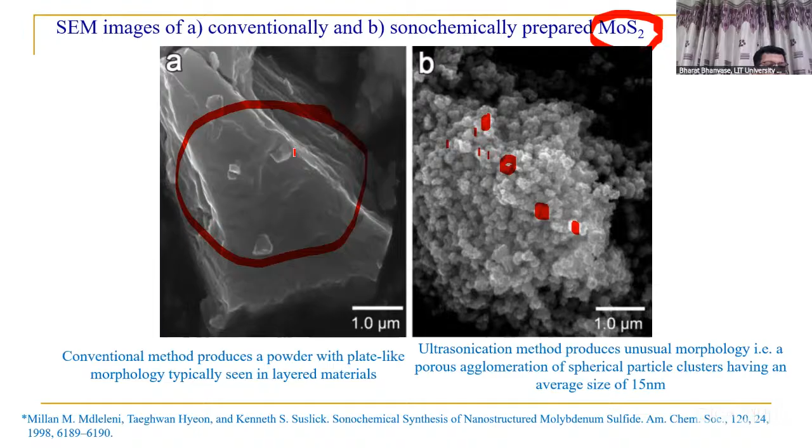Now the effect of ultrasonication in nanocomposite synthesis: effective exfoliation of the base material, which has a layer structure - one layer separated from another. So every layer is exposed to the other compound or reactant. This reduces particle size and gives uniform dispersion - the other component deposits and is present on the layer, well dispersed. Nano-engineered material can be synthesized using this.

This is one example with the conventional stirring method - this is the formation of nanocomposite, but these particles are agglomerated here, many particles present together. But if you use the ultrasound assisted sonochemical method, the particles are distinguished and well dispersed, as you can observe here. So that is the advantage of the ultrasound technique.

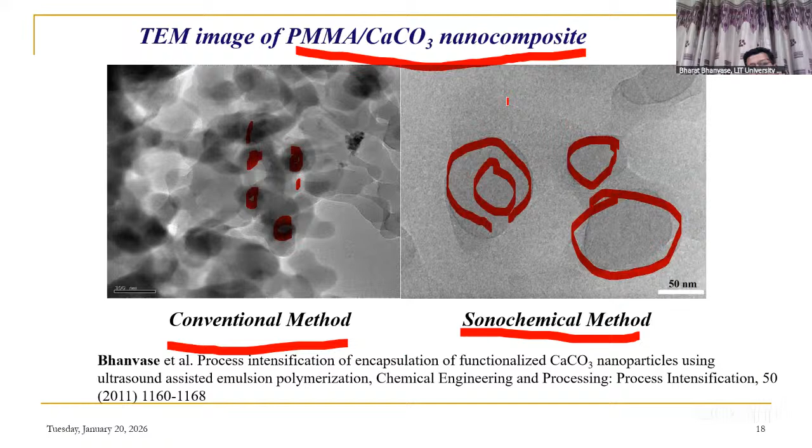Coming to another part - graphene, carbon. Everyone knows coal, which is carbon. So what are the forms of carbon? Carbon can be graphite, which is used in pencils for writing - that is a graphite material. Then another form is amorphous carbon. Diamond is again a form of carbon. Then fullerene, which has a football-type structure, and carbon nanotube - a carbon layer wrapped to form a pipe-like, tube-like structure.

So you can see different forms. Diamond has a structure something like this. Its electrical conductivity is very less, no moving electrons, and it is the hardest material - a hard material that can be used in jewelry.

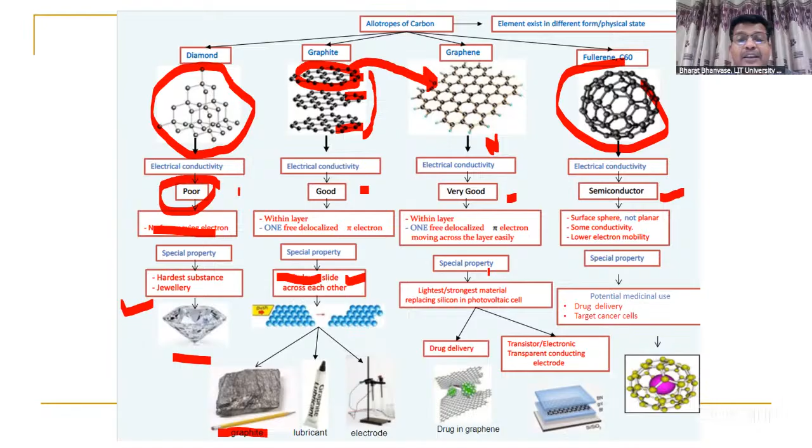So another one is fullerene. This is a football type of structure. It is a semiconductor, so it can be used in drug delivery, or you can say targeting cancer cells. So that is where you can find this application. This is the structure of carbon we have already seen.

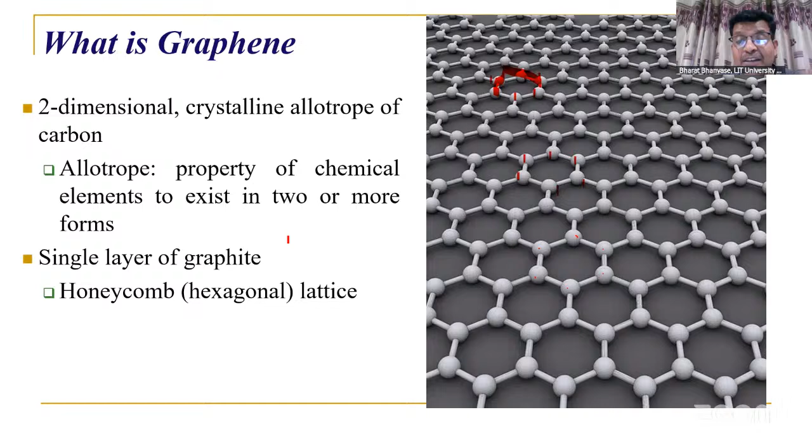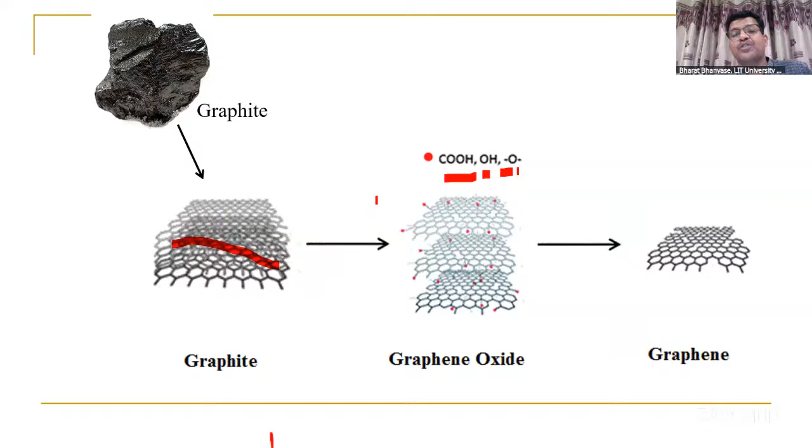So it will have great applications. Suppose you take graphite - this is a layer structure. It can be oxidized using NaNO3 or sulfuric acid, and then some functional groups can be created on this, such as carboxylic group, OH group, or oxygen functionalities. That is called graphene oxide. And then if you want to reduce this graphene oxide, we need to remove these oxygen functionalities, which will lead to RGO - reduced graphene oxide.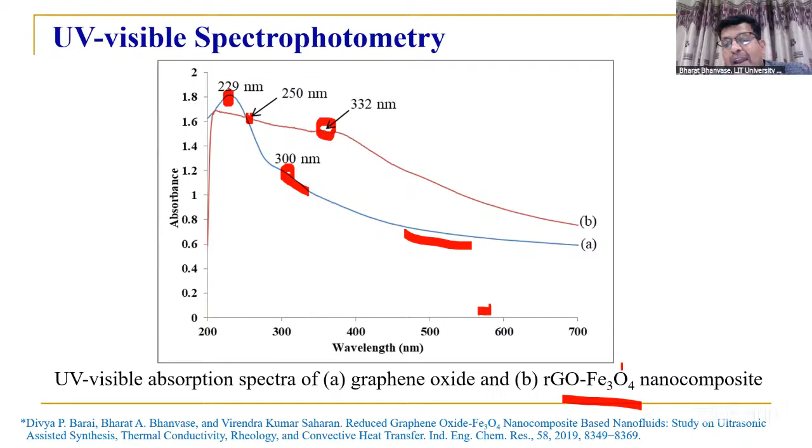So here if you see characterization, this is UV visible. The blue line is showing graphene oxide, which is having characteristic peaks at 229 and 300, that confirms the formation of graphene oxide. And another one is RGO Fe3O4 nanocomposite, with peaks at 332 and 250. That confirms the conversion of graphene oxide into reduced graphene oxide and loading of Fe3O4 nanoparticles on that.

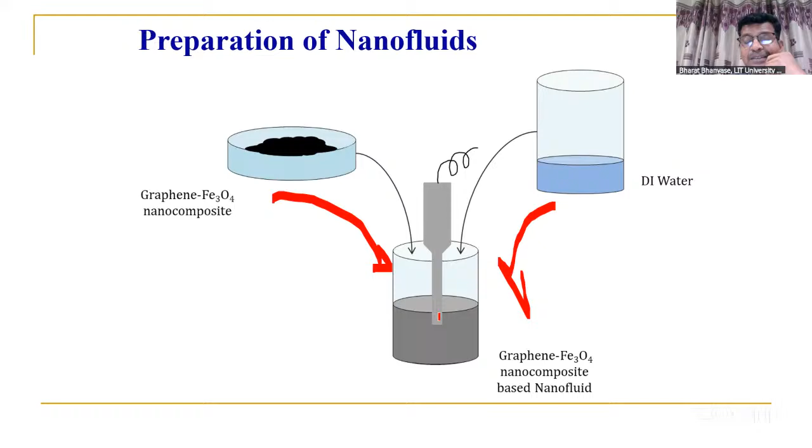Then preparation of nanofluid, already we have discussed. This graphene Fe3O4 nanocomposite is added, water is added, it is mixed in the presence of ultrasound, that is the two-step method we have used. And then we are testing thermal conductivity and rheological properties.

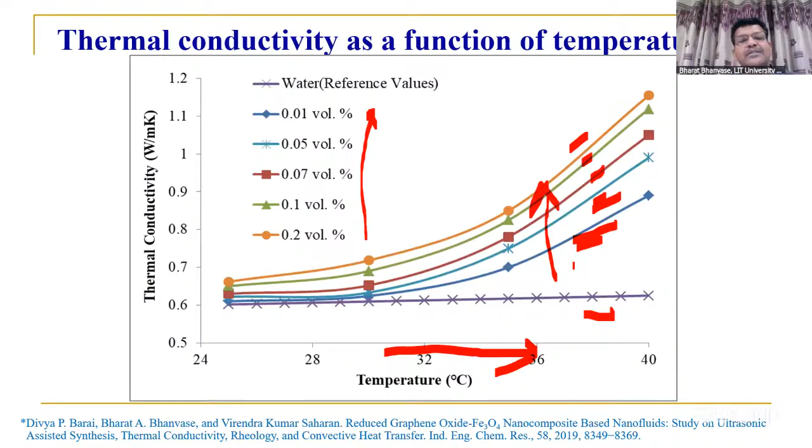So this is the instrument we have used, the KD2 Pro thermal property analyzer, and from that we have calculated the thermal conductivity. This is thermal conductivity at different concentrations of that composite and at different temperatures also. So for water, then 0.01%, 0.05, 0.07, then 0.1 and 0.2%, if we add more nanocomposite material, its thermal conductivity will increase. This is with respect to temperature and concentration, it is a similar graph.

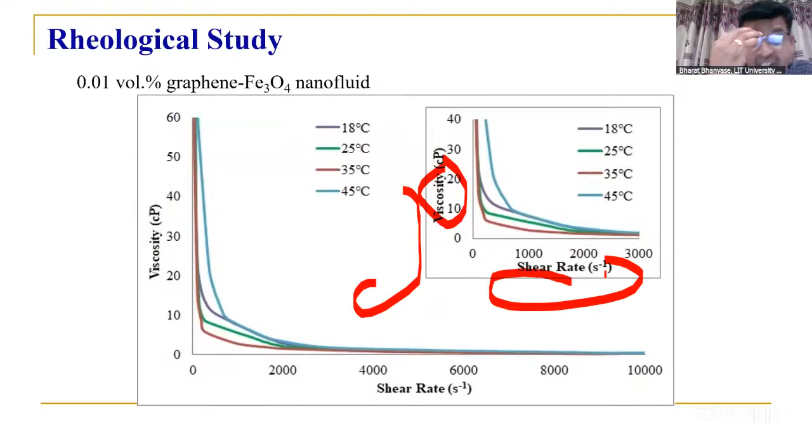This is a rheological property, we have tested viscosity, how viscosity is getting changed with respect to shear rate, that is by applying some force, how that viscosity is getting changed. So that part is studied in this case. We know that with the addition of nanoparticles, some viscosity increase is there, but it is not drastic, it is a slight increase in viscosity observed here.

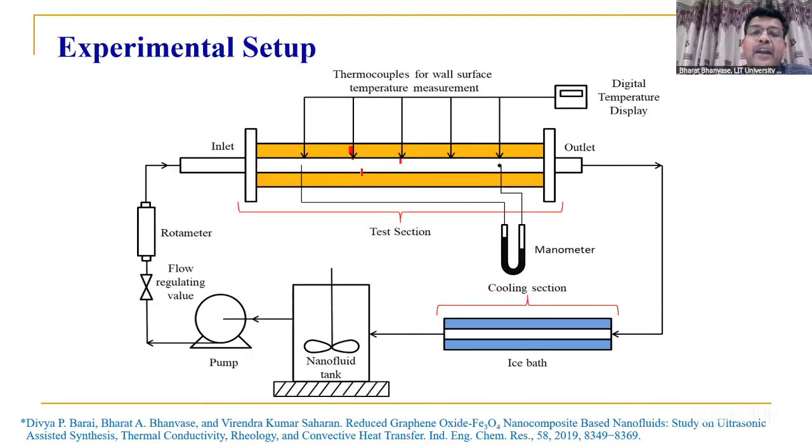Then similar type of setup what we have used. Here surface temperature was measured, and nanofluid is passed through this, what nanofluid is prepared, and this is a closed loop. And from that we have calculated, studied the heat transfer coefficient and Nusselt number at different concentrations of the nanofluid and different Reynolds numbers.

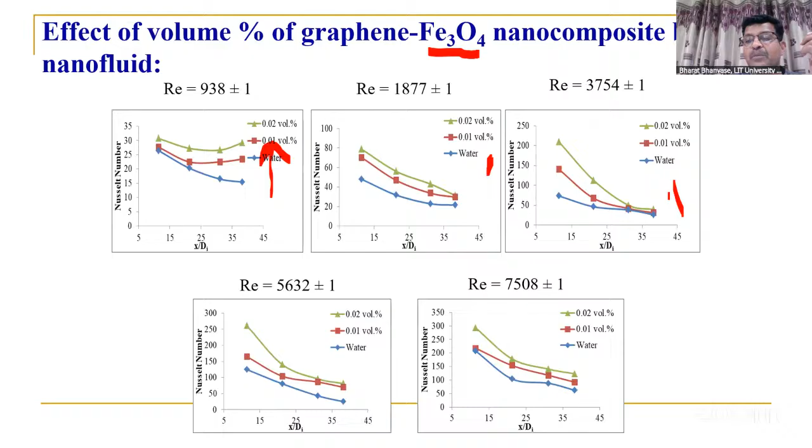So these are different correlations, and this is what we got for Fe3O4, graphene Fe3O4 nanocomposite. We observe that Nusselt number is increased with the addition of nanocomposite, for different Reynolds numbers, different flow conditions. So already we have seen, in every case, it is observed to increase.

So in summary, you can say fine deposition or uniform deposition of metal oxide, that is Fe3O4, on graphene sheet is observed, and that is because of enhanced nucleation and solute transfer, because of cavitation induced by ultrasound. Then reduced particle size, uniform dispersion of Fe3O4 nanoparticle on RGO, then better properties due to fine dispersion. So that is the another case.

Convective heat transfer studies reveal thermal performance of graphene Fe3O4 nanofluid. We found improved heat transfer coefficient, that is Nusselt number, because of improved thermal conductivity due to Brownian motion in the nanofluid.

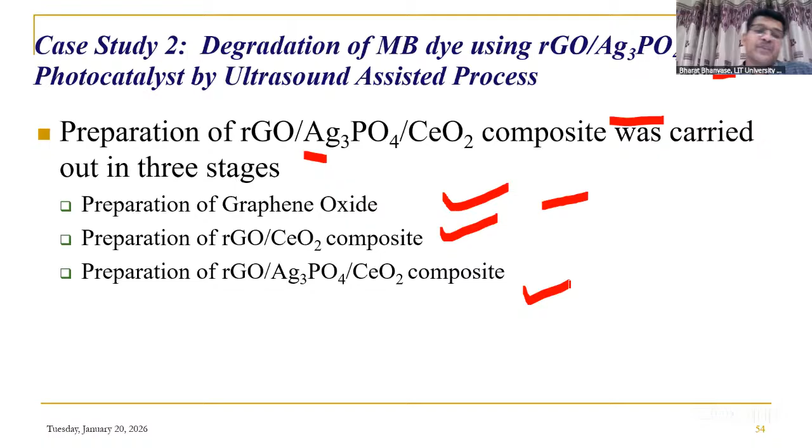So one more case study we'll take and then we'll stop. Here in this preparation of reduced graphene oxide, we have loaded Ag3PO4 and cerium oxide. That composite was prepared and used as a photocatalyst for the degradation of MB dye. First step is preparation of graphene oxide, second step is preparation of RgO-CeO2, third is RgO, Ag3PO4 and CeO2 composite.

A similar type of process is used for the preparation of graphene oxide, which is the modified Hummer's method in the presence of ultrasound, as discussed in the previous case. That will form graphene oxide.

Once you get graphene oxide, we have to load cerium oxide on it. For that, 0.5 gram of graphene oxide was added in 30 ml of distilled water, then sonicated for 20 minutes. Then cerium nitrate hexahydrate was added to the 30 ml graphene oxide solution, and again it is sonicated.

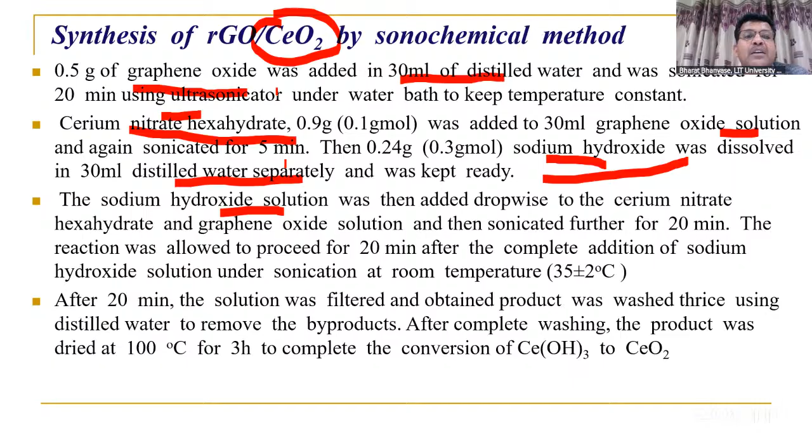Then 0.24 gram sodium hydroxide was dissolved in another beaker and kept ready. Sodium hydroxide solution was added dropwise into the solution of cerium nitrate and graphene oxide, and then it is sonicated for 20 minutes. That leads to the formation of rGO/CeO2 composite.

Then we have loaded Ag3PO4 on that. The prepared RgO-CeO2 nanocomposite was dispersed into distilled water and sonicated for 30 minutes, and then immediately we added AgNO3 solution. Then this solution was added to the dispersion, and Na2HPO4 aqueous solution was added. This will form Ag3PO4, which is loaded on the RgO-CeO2 nanocomposite, leading to the formation of RgO, Ag3PO4 and CeO2 composite.

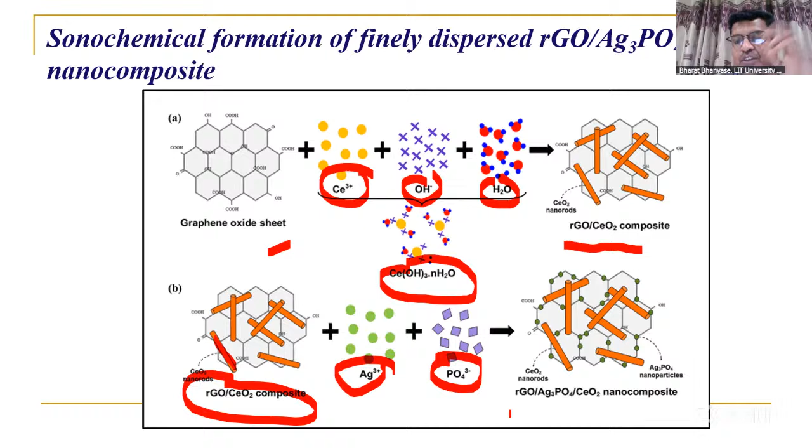So this is the mechanism. If you see, this is the graphene sheet. On that, cerium hydroxide (Ce(OH)3.nH2O) leads to the formation of rGO/CeO2 composite, which is in a rod form. To that, we have added AgNO3 and Na2HPO4, which leads to the formation of Ag3PO4 deposited on the RgO-CeO2 nanocomposite. This is well validated by UV-Vis analysis.

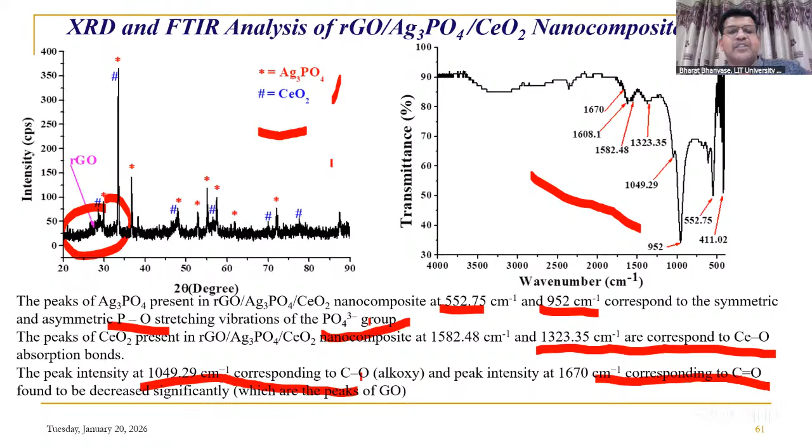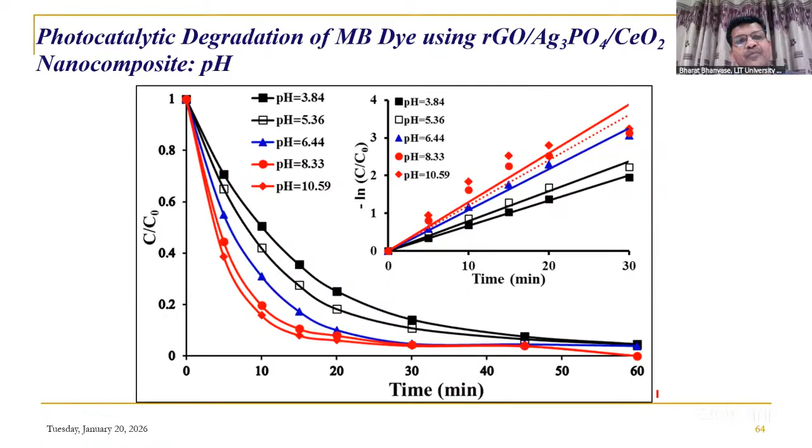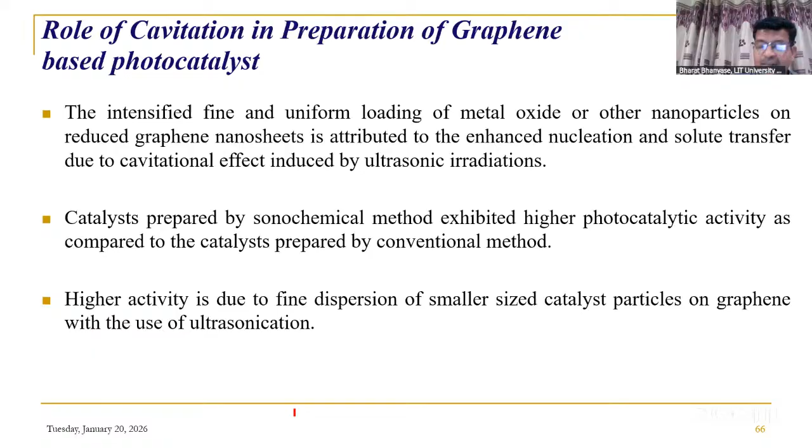So this is today's second presentation. Our research group is working in different research areas as explained in the introductory session also: advanced oxidation process, liquid emulsion membrane, photocatalysis, cavitation based process for preparation of nanomaterial and nanocomposite, process intensification, microreactor systems for production of nanomaterials, nanofluids for heat transfer application, and solid waste processing for preparation of value-added products.

We now have consultancies from 4 industries, and we have succeeded at pilot scale also. We are preparing some value-added products from wastewater as well as solid waste, and giving solutions to industry also. We are well connected with industries, and they are giving us different problems to work on.

So these are some questions. If you have any questions, I think I will address those.

Yes, sir, I'm Dr. Mote. Is this CBD method or SILAR method? It is not CBD, it is ultrasound assisted method, and it is a wet chemical method. Okay, okay, sir, thank you, sir.